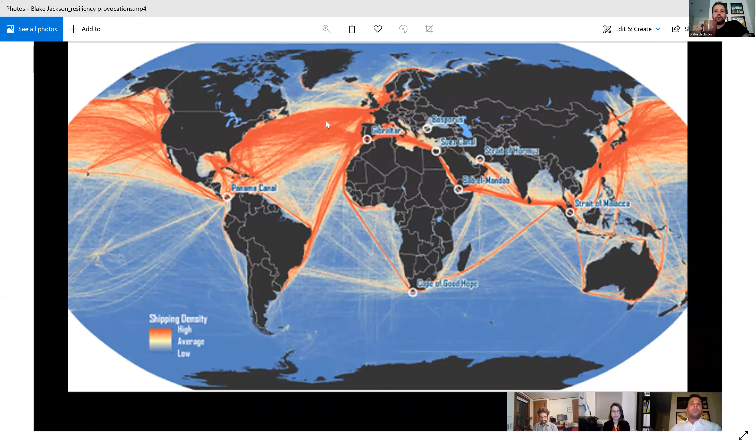This is one of many diagrams I could have chosen to really talk about the importance of coastal cities and their interconnectivity internationally, and their purpose in being a place that not only does commerce, but also is a place where people want to be. We're going to talk a lot about Boston tonight. We realize this is a Boston-based conference with a New England-based clientele, and this is going to feel like an Affleck and Matt Damon movie after we're done, I'm sure.

If we think about Boston, it's 400 years of urban morphology from its founding by the Pilgrims up until today. We've actually grown the city by expanding into the water. And there's a big debate nowadays about whether we should retreat from the water, retreat inland, what's the future of coastal cities with climate change and sea level rise.

I'm of the opinion that maybe we continue to develop into the water, and it's in our best interest, because if we don't, the morphology of Boston by 2070 will begin to mimic what it looked like when the Pilgrims arrived in 1630, because of climate change and sea level rise. The approach right now within the city of Boston is to do this brick by brick, or parcel by parcel method, whereby we utilize new developments and large scale renovation projects as they come on board in order to piecemeal the protection needed to modernize our resilience relative to stormwater, heat island, and sea level rise, and blue, green, and gray infrastructure.

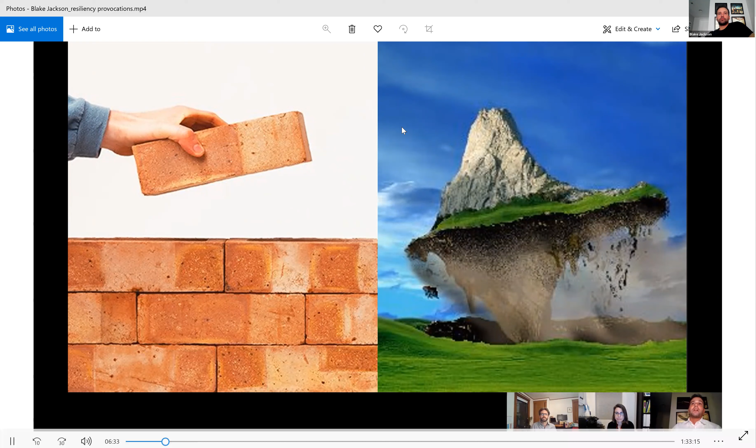On the flip side, the other methodology would be to lift a mountain, so to speak, or to think in terms of big scale urban mega-infrastructure projects. The goal was to think big. So at least with terra firma, I'm not thinking in terms of brick by brick, but more of moving the mountain that I feel is necessary to protect us. And I'm certainly not the first or only person who has thought about this.

This is a plan from the mid-1980s done by Antonio Di Mambro, and he envisioned a plan whereby we would link Winthrop to Quincy via harbor islands and green and gray infrastructure projects that would broaden the city, enrich the city, create opportunities that didn't exist before, and buy us the long-term protection that we'll need in a changing climate. More recently, there have been adaptations of this plan that look at just what it would take to protect the inner harbor.

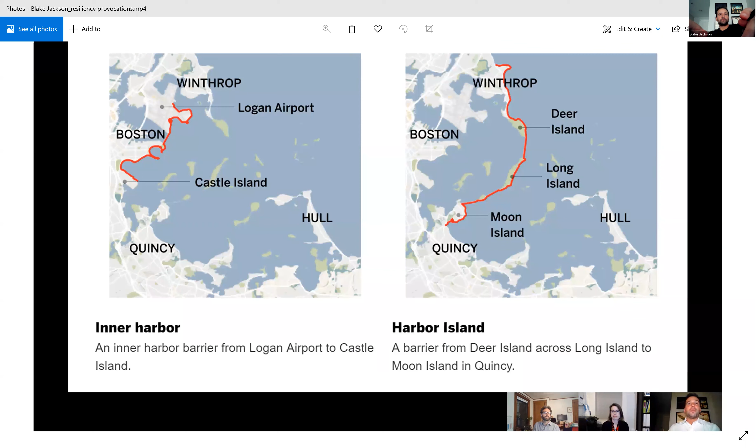Utilizing Di Mambro's plan of the harbor line necklace that connects Winthrop to Quincy. More ambitious would be connecting the outer harbor, which is Winthrop all the way and everything to the west. A more recent development within this plan would be the sapphire necklace, which utilizes a hybrid approach to these series of plans in order to buy protection, acknowledging the fact that some climate change is inevitable.

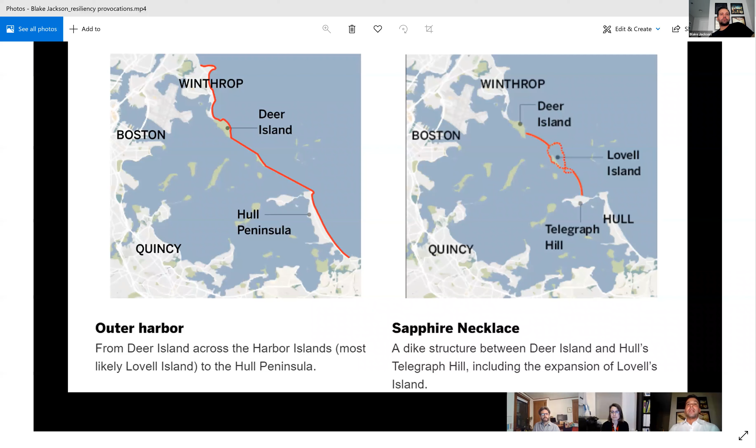I would like to remind the good people of Boston that we have done and performed large-scale infrastructure projects before, and perhaps the large-scale infrastructure projects of the past are impeding us from being able to envision the future, just because there were unintended consequences and price overruns associated with them. But I continue to be an advocate of dreaming big.

So we're acknowledging the fact that maybe even our best climate scientists don't really understand the level of detail or concern in their predictions. Maybe they're a bit too conservative. The jury is still out.

So I began to look at where our development is being planned and where our most vulnerable sites are, relative to the area of most interest. And it just so happens to be our beloved seaport. This is a look at the seaport.

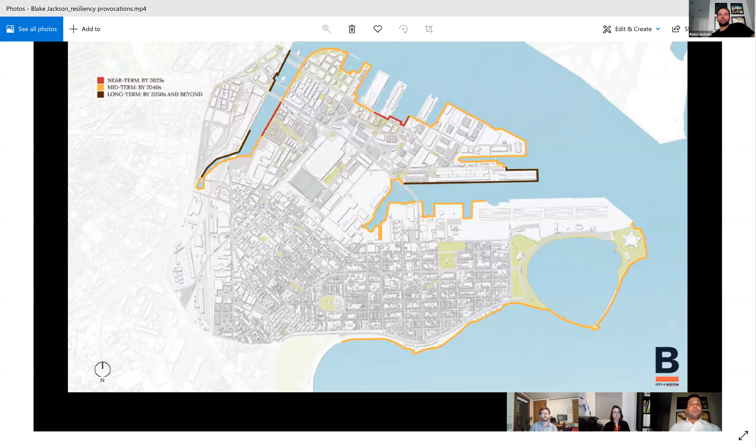And again, this is with the brick-by-brick or parcel-by-parcel development upgrade approach. These are numbers from 2018, the latest numbers I could find that have been quantified as part of the Climate Ready Boston reporting.

The capital cost to realize these measures in 2018 dollars was between $513 million to $1 billion, with an annual maintenance cost between $7.7 to $15 million, a net project benefit of 3.9 to 19. I couldn't find the exact definition of what this meant, but I believe it meant the money invested relative to the real estate protected, and the benefit-to-cost ratio, which is the sum of the two numbers above relative to the net project benefit, somewhere between 8.7 to 44.9.

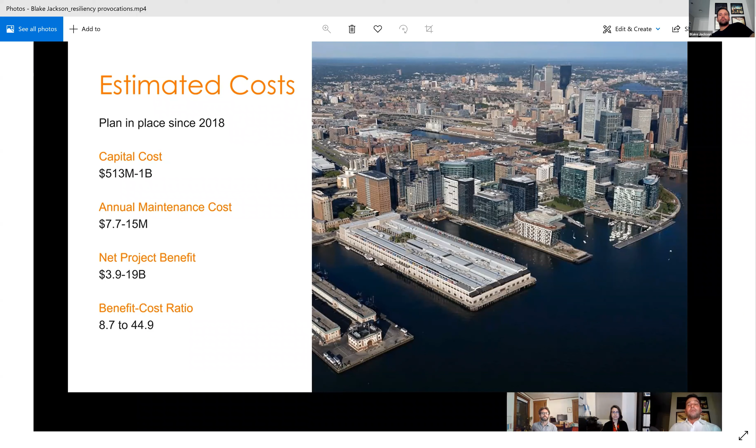But I'd suggest we just focus on these larger numbers than the first three categories up at the top here. So again, for a brand new neighborhood, there's already a lot of risk built into it that comes with the territory, so to speak.

If we start to look at the exposure also in place as of 2018, currently almost 1,000 people, 60 buildings, and $140 million worth of damages can be expected from issues like what we talked about with 2017 and also 2015 with the snowpocalypse. But if you look at 2030, this number begins to ramp up pretty substantially—the amount of money involved ratchets up about 10 times.

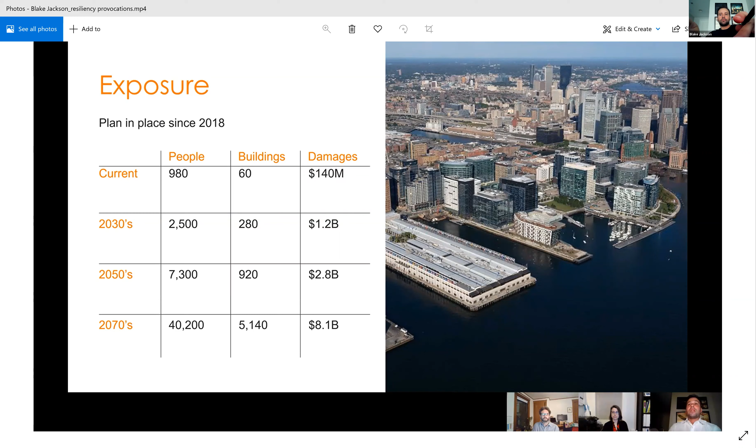And then at 2070, it really begins to spiral out of control. So as a business-as-usual case, we're looking at upwards of 40,000 people impacted, over 5,100 buildings, and $8.1 billion of damages if we don't do anything. So again, we are talking about 2030—if we don't do anything by then, it completely spirals out of control by 2050 and beyond. And it's not such a foreign idea, even today, to build into the land.

Even though the retreat is a conversation being had by others, there are proposals now along Northern Avenue and the Fort Point Channel that are actually proposing to build green-to-gray infrastructure and active barriers, while maintaining accessibility to the waterfront, recreation space, and a series of different experiences. Because it's not just about real estate and risk, it's also about people, space, and being where you want - the water being a place where we can develop and also a place where we want to develop.

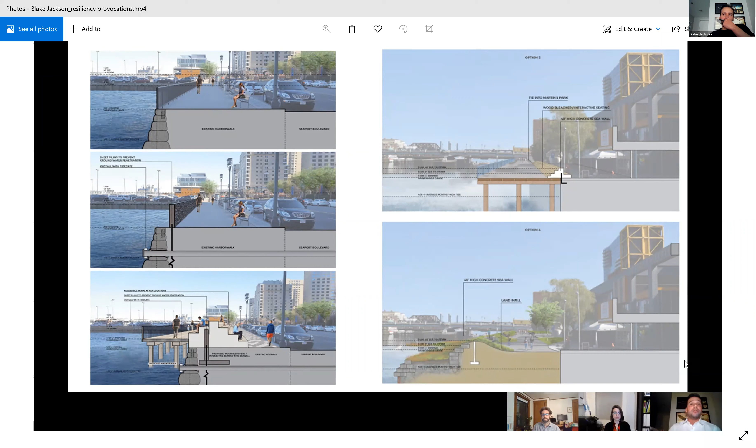Being the largest natural aspect of Boston, it's pretty important, one would argue - it's the reason why we settled here in the first place. And these types of measures are not just being looked at for those two sites, but all around this area of protection, with various different strategies which I'm sure the other panelists will talk about a little later.

This is just one look at this idea behind a living shoreline. This is the east side of the Fort Point Channel in the Seaport. It looks at what was going to be the GE headquarters, and this notion that we're going to have some flooding and maybe that's okay.

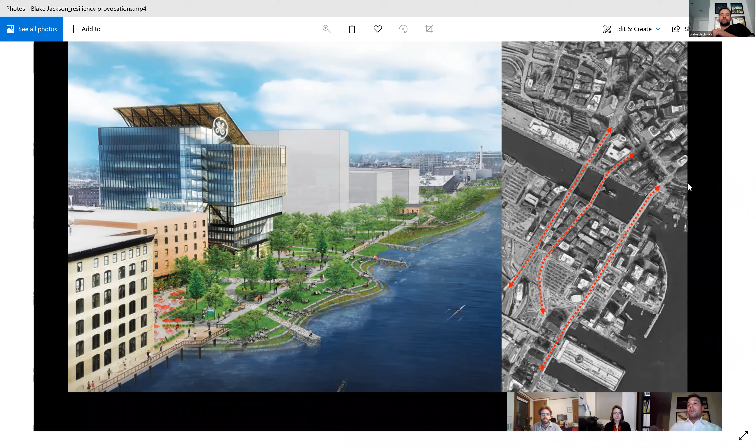But I question that, because there is very limited connectivity between this new neighborhood and the city. If we have flooding in the Fort Point Channel, it creates a scenario where South Boston becomes really an island, and its connectivity to the city becomes, to me, one of the biggest challenges and risks of not thinking big enough. Right now it's already difficult from a traffic standpoint to get to and from this part of the city to the city proper - do we really want to risk making that worse?

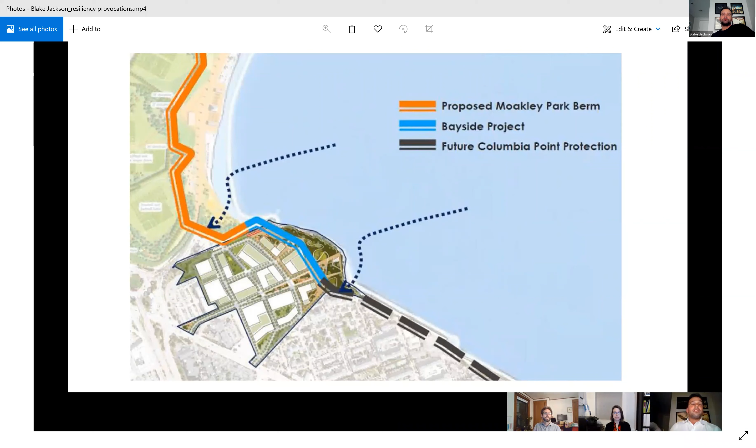This is another look at how the idea is being carried out south of here and other areas of the city - East Boston, Moakley Park and the Bayside neighborhood, Fort Point, and future Columbia Point protection plans. We're having to think about this because the water is going to rise simultaneously everywhere, so it's a time-based situation that we're looking at.

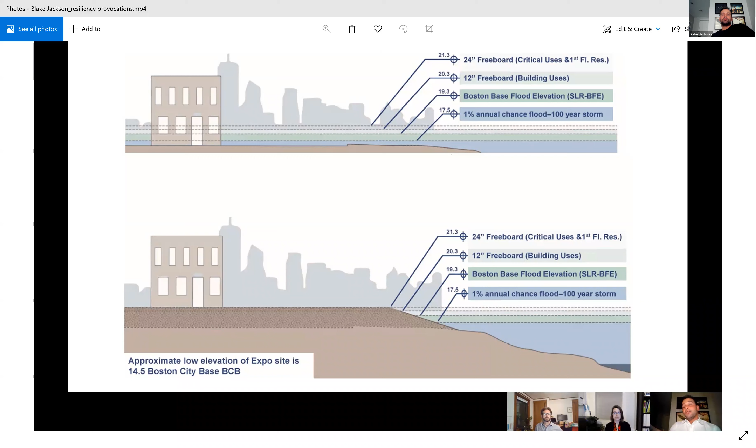Right now the solution is maybe to build up. Maybe the solution is to build up and out, or maybe just out - let's talk a little bit about what that looks like. I'm not trying to say that Dubai's got it right, specifically from a sustainability standpoint, but building out into the water creates an opportunity. New terra firma increases the real estate in and around the waterfront, and that is certainly economically a very viable option. We need to make it an ecological option as well.

So this is a zoom out of the Seaport and a look at our boundary condition of the area that we would utilize the terra firma approach to impact. So what is the challenge? Well, it's the fact that we have 8.25 linear miles of waterfront to protect - it basically protects everything from the sea terminal all the way to South Station and everything behind it.

My solution is simple: let's build out a few feet to create a continuous harbor walk. It's not disjointed as the current one is - that basically lessens the problem. By making the amount of shoreline smaller, we've cut the problem essentially in half, to 4.2 linear miles of wall. It could even be done differently, but what we tried to do here is maintain some of the historic Fort Point Channel.

Access to the cruise ships, as well as the maintenance areas for ships in the eastern point down here. And when you do that, well, what does it create?

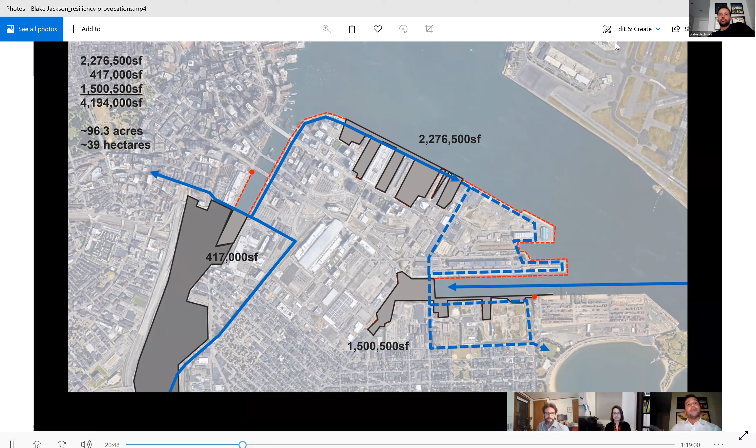So what does this generate in terms of opportunity? Well, these are 2018 March numbers. We looked at typical rents for the various different types of buildings that would be going into any potential development here. So a mix of lab, Class A office, housing, and retail, with a very minimal, almost too conservative, FAR allowable of 6.0.

Which translated to almost 4.2 million square feet of terra firma created. This equals an area of over 25 million square feet. And if you think that it's 30% of all these above uses plus 10% retail at grade, it generates something in the ballpark of $1.8 billion of real estate value per year in just the rents. Again, these are speculations, these are architects' numbers, but that seems to me like a pretty big number of missed opportunity to cut the problem of protecting the neighborhood in half.

And if we look at Plan A, which is business as usual, which we presented earlier, versus Plan B, which is our scheme, or our big idea, the value created is an additional $1.8 billion per year in rents. The capital cost is going to be roughly the same, whether we invested in 8.75 or 8.25 miles of urban coastline, or we invested in filling the land in 4.25 miles of coastline.

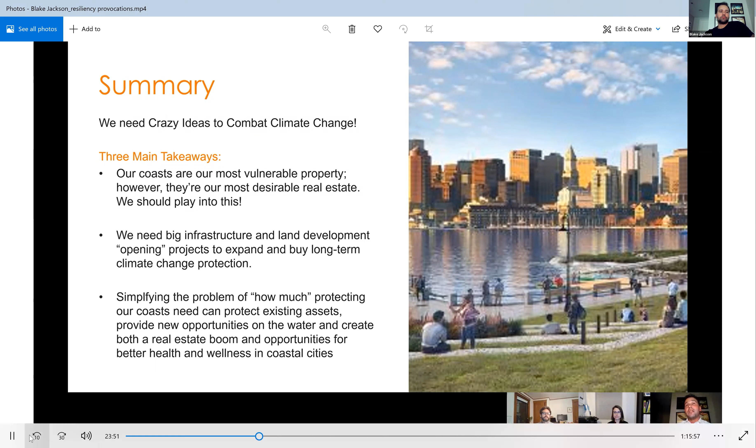Simplifying the problem of how much protection we need can help tremendously, and it can also provide new opportunities to not only get people closer to the water and celebrate the reason why Boston exists in the first place, but it can create a real estate boom and opportunities to enhance the health and wellness of the entire city, not only here in this neighborhood, but other neighborhoods and also other coastal cities.

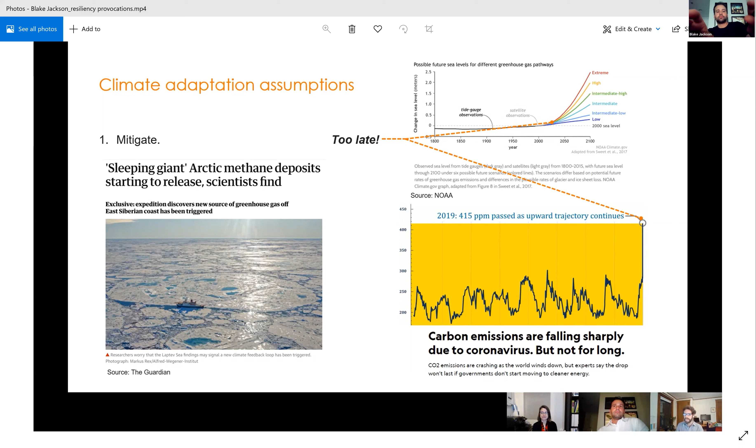Is mitigation important? Sure, but it's not going to happen fast enough. The choices are kind of clear: it's too late to mitigate, we're unlikely to stop building and give up, we're unlikely to stop procreating and building less. I'm sure we can think about colonizing Mars, and some are excited about that, maybe Isabel as well.

I'm giving you a hard time. Moving out of harm's way is expensive and politically tough. Same thing with relocation—not that these are bad strategies, it's just like the Seaport District that Blake talked about. It seems unlikely we'll stop growing or throw away the billions we've already invested.

So building differently, there's an idea. Let's start with Blake's newly created land, which is amazing. We've got new land, that's super exciting, but not so fast—remember, we have to build better. So I don't think it's too much to ask to put some basic stipulations on Blake's amazing new land, and start poking some holes in it, almost literally.

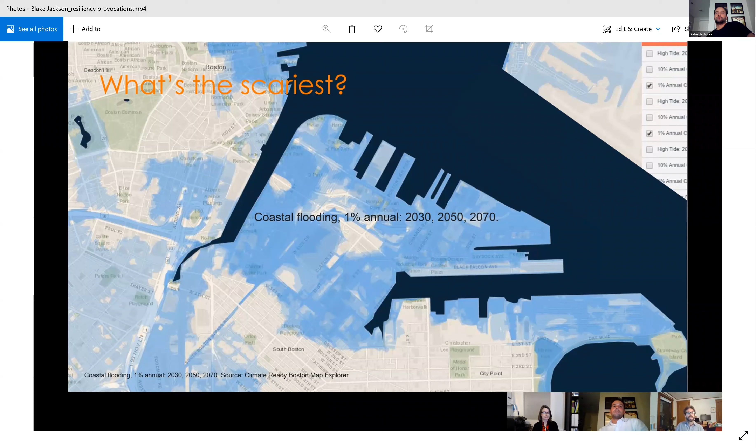Blake showed you some climate projections from the Climate Ready Boston map explorer—you can find that online. What is it we fear most? Here's coastal flooding, as he showed. But that's relatively easy, we can build higher. So why complicate things? Just go ahead and build higher. With that done, we're set. That was pretty easy.

Since the existing bridges from Boston to the Seaport District are at higher elevations, such as Summer Street, running about 10 to 12 feet higher for some portions, there's already precedent in the area for raising roads to meet the elevated sites.

So we can grab this bull by the horns and be proactive before we develop those new sites Blake is proposing, and put those lazy horizontal surfaces to work. What do I mean? Think of a 2-inch rain—that adds 70,000 cubic feet of water to our newly made land, like we have in most of the Seaport District, a very impervious area. Where's that all going to go?

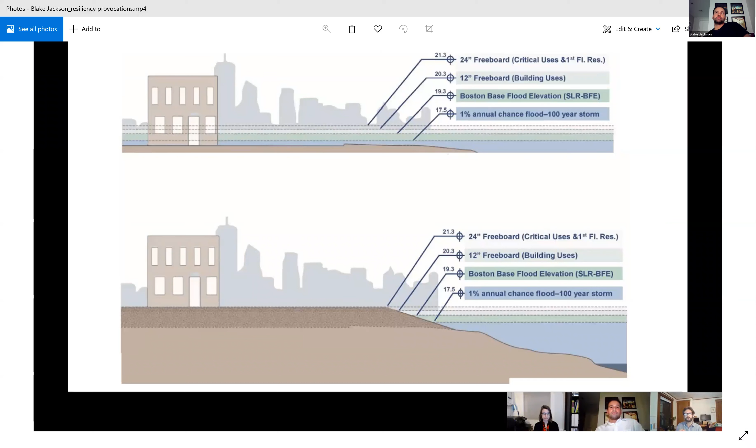So back to what that new land is made of, we can precondition it. There's a fantastic opportunity right under our feet to address not only inland flooding and cloudburst events, but also the other side of the equation—extreme heat—by keeping water available on site when it's most needed. So what's under here right now? It's rarely ever dirt. It would take a lot of H&H studies to find out, maybe one big one, but we can look around us and get a decent idea.

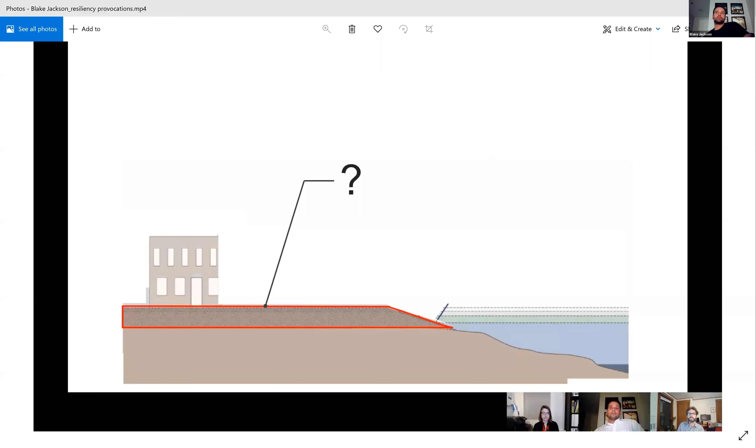And if you remember from civil engineering or geology, remember your soil types?

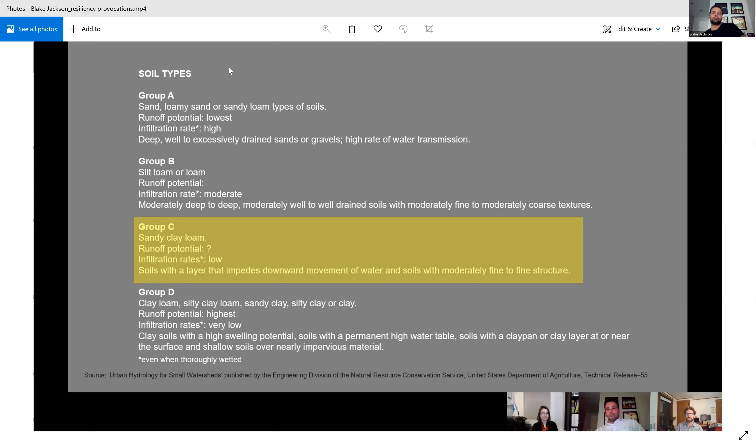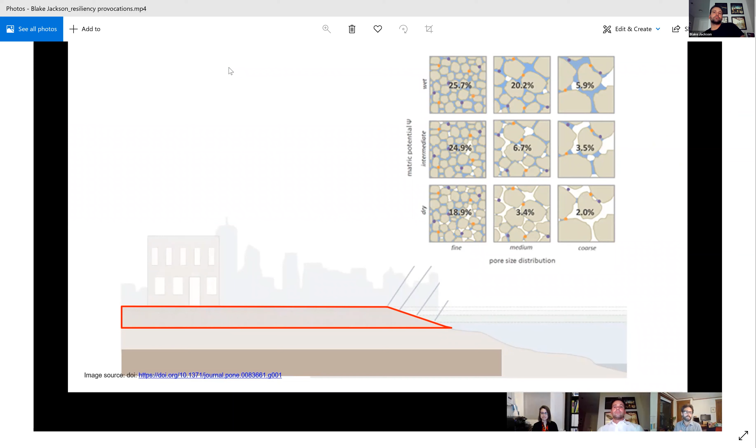So this is a design opportunity. What do we want to be under there? Building higher is, to a large degree, an opportunity for us to redesign what is under there and how we might put it to use as something other than just fill. We're not just filling space, we want to do something with that.

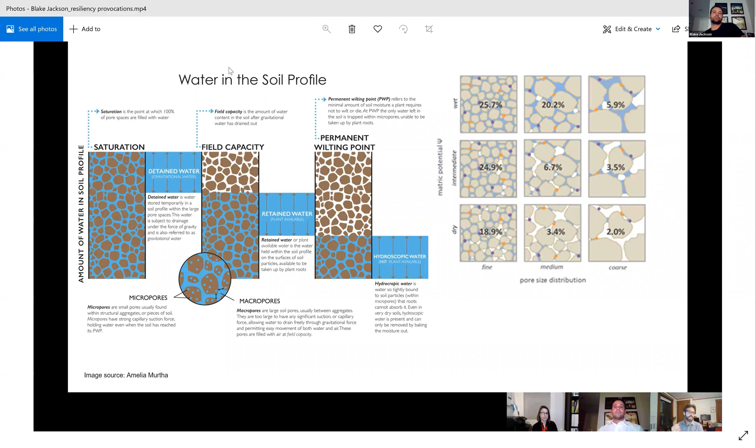Here's where the holes come in. So in this slide, think of the void space in the soil. Those are places where we can hold water. It can be pretty significant depending on the soil or fill type, the water table, the level of saturation of the soil, and this is really our reservoir. The newly made land that Blake is proposing is the reservoir for holding that water.

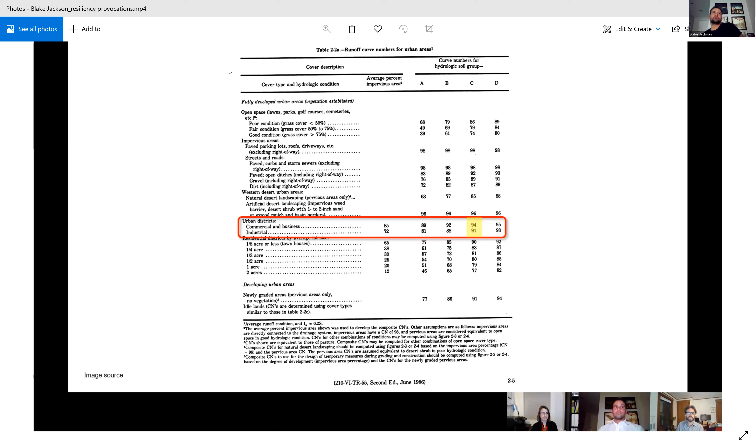We also need to think about infiltration rates and actually use them, deploy them as a micro adaptation strategy cumulatively, collectively, across multiple sites. Think of all of those sites collectively that we could precondition as newly made parcels with 5 to 10% open space that include setbacks. So not the usual hardscaping, remember that.

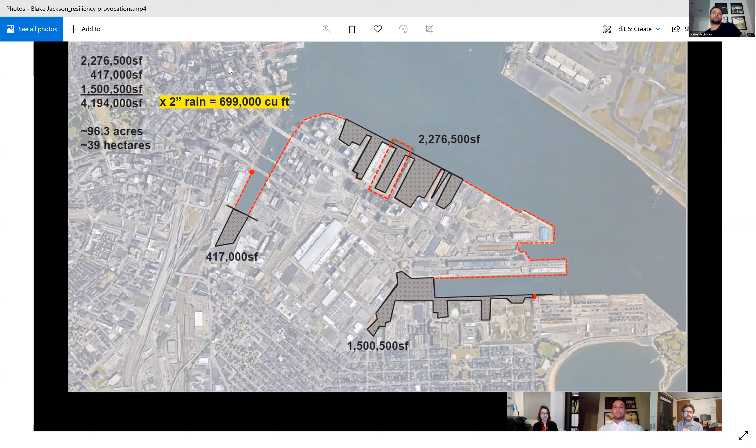So let's take a look. What does that look like for one of the smaller sites, dashed red? See what it looks like when it rains. So if we build densely in the urban cores Blake was talking about, keeping modest setbacks—these are not crazy setbacks, that's 60 feet in there—with a moderately dense building envelope, which I'll touch on later.

We still yield on this site an amazing amount of open space, 50%. Okay, that's a crazy idea, not every site is going to have 50% open space. Fine. But if we think about what's below in that fill area, if we devote just 2 feet of the below grade volume, given those setbacks and assuming some sort of thickness of the containment structure, we still manage to detain over 70,000 cubic feet, 72,000 cubic feet of storm or flood water, and that's for a 2-inch rain, remember.

So as a research question for you students out there, or folks that really want to dig into this: is that a lot? Is that, quote, enough? What's the design storm that we're anticipating here, and what kind of volume do we want to detain? Because this is something, again, we design.

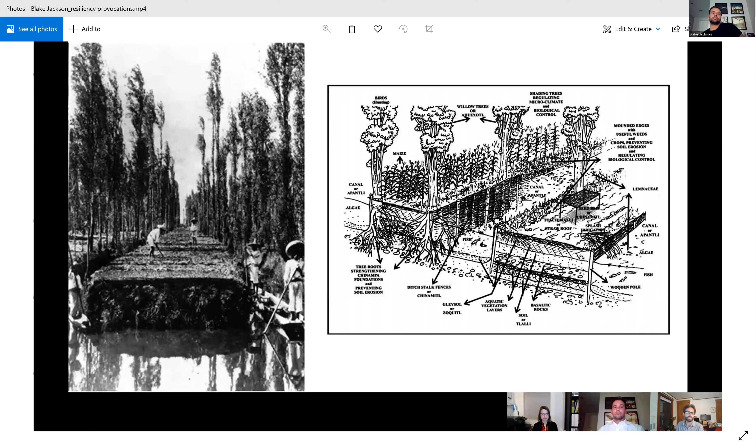So this is folks on barges taking that muck from the bottom that they've dredged up and piling it onto those floating gardens. Pretty cool, I think. It seems like a really amazing place to be. The land is wildly productive. So I really love this example.

But back to reality, the Seaport District is really valuable land, as Blake has alluded to. It's not likely to be given over to raising corn, beans, and squash. Maybe Matt Damon could grow some potatoes on a windowsill, but let's face it, we're not going to build exactly like this. This is the Seaport District—this was working waterfront in the traditional sense through the 1960s. So we can make it feel like one again. If we're not going to focus on a productive landscape beside another productive ecosystem, which is the sea, let's at least get people used to being beside and on the water again, using the language of water, the language of ports.

We're already speaking the language of the seaport. That shipping terminal nearby - why don't we extend it further using technology we're already familiar with?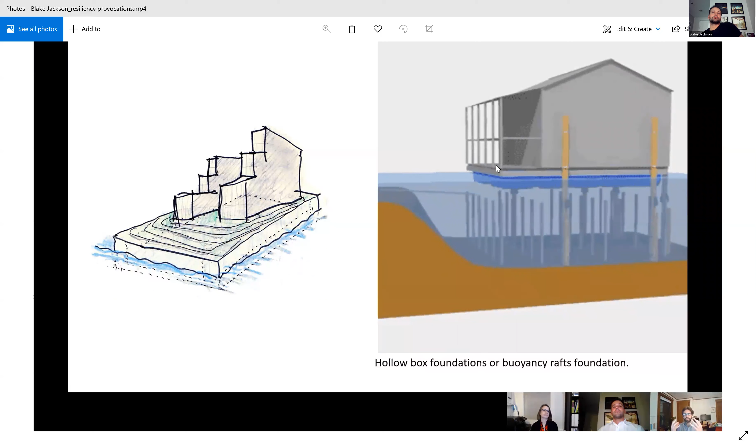So while we're at it, why does the new land we make have to be just fill, down-filled, that sits there and does nothing? Can it float? At the bare minimum, it should keep our new investments above water. But what if we could fill that floating inner tube with a reservoir of water? Water which we'll need later - remember the extreme heat map.

You know, personally, I prefer Christopher Cross, 'Sailing.' I was going to try to play that as a video, but that's kind of tricky. So go listen to Christopher Cross, folks.

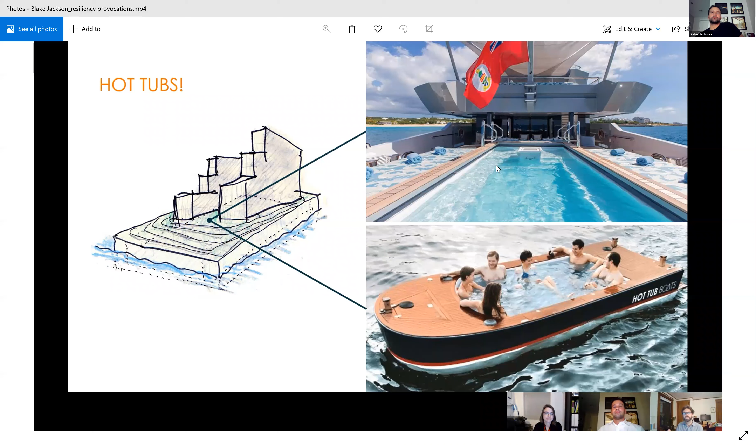Can we return the sea to the seafront? So again, crazy ideas, but those crazy ideas are something that designers love to run with.

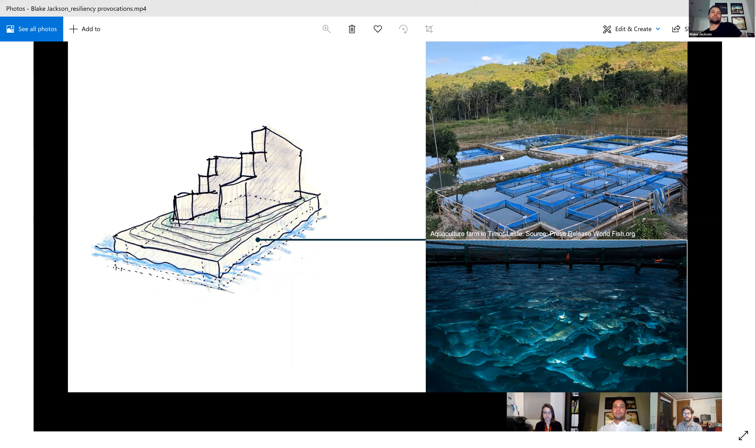Another way of approaching this is horizontally, by shaping the land subtly as nature does. This is the coast, shaped by wind and waves. I realize it's a little different, but think of the Seaport District - it's almost totally flat. It's boring.

Pretty different from many coasts that we'd like to be on. And for land that's adjoining what used to be salt marshes historically, it's actually unnatural. Just remind yourself how water naturally lies on the land - there are spaces for it to sit there and fill in.

So this is about 150 years ago, and I know things changed - depends on local geology, but really salt marshes changed very little. This would have been the case in the area of Roxbury Creek and Fort Point Channel, which we'll touch on in a second. Notice that 16-foot long hay wagon - so by the time you get to the shore, maybe the scale's off a little bit, but there's a substantial change in elevation at the shore.

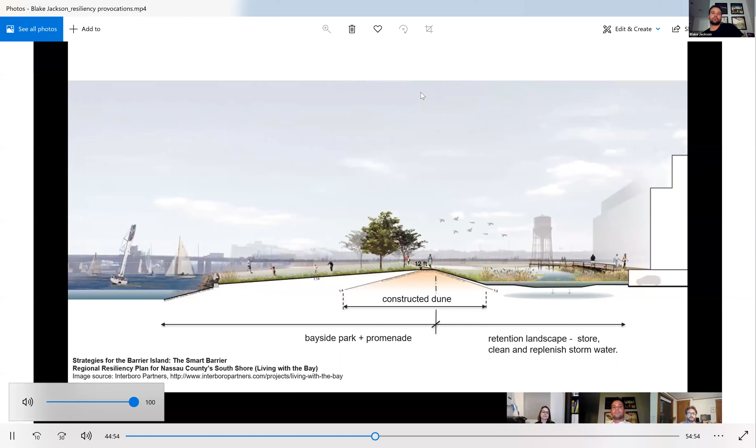And we can do this on large scales, especially if we have the advantage of horizontal distance. There's the Moakley Park project, which is a fantastic project - I think Isabella's going to touch on that. And it builds a set of dunes.

A constructed dune, with a berm on the inside - kind of belts and suspenders. But don't forget that we've got water coming from the inland side of things, in this case the South Boston neighborhood. So we can't absorb the sea, but we can detain stormwater and manage inland flooding to a degree.

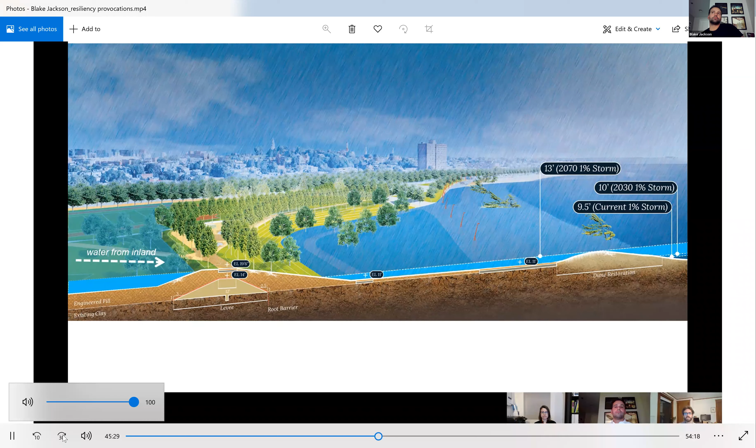We can also do this on a smaller site scale. This is actually from the proposal for the Fort Point Channel open space plan, which we didn't get, unfortunately, but we still thought our ideas were good. So make that water have to work to get to your building - drive it uphill. And while it's being forced to move horizontally, it's losing ground, literally, by being absorbed through more porous surfaces. And if you have the advantage of horizontal distance, you can try to balance cut and fill.

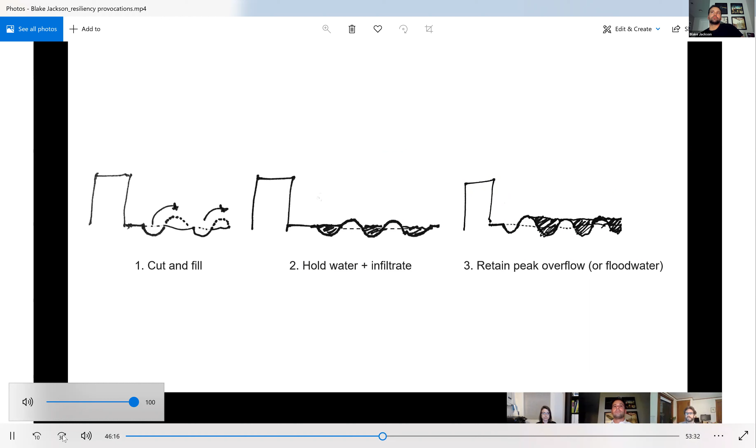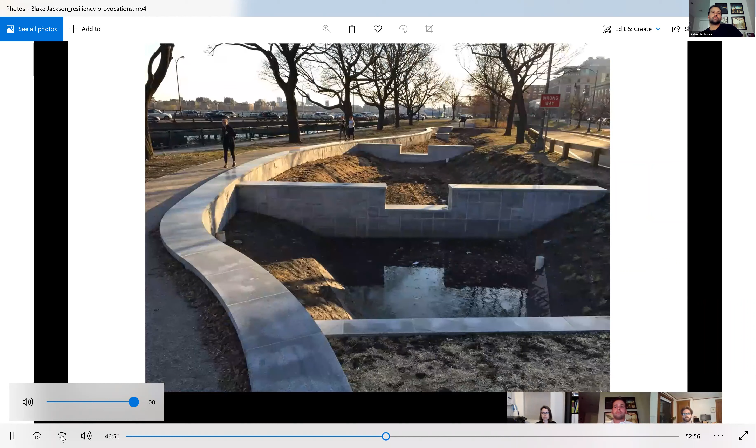There are lots of ways to do this: stormwater detention, infiltration trenches, tree pits, bioswales. This is an example alongside Longfellow Bridge. It's a stormwater detention basin, which keeps water from flowing straight into the Charles River. You'll hear more about these kinds of techniques from Isabel later. In this one, the water has to move through baffles and gets infiltrated long before it goes out into the Charles River, so it's also cleaning the water in the process.

And it creates a pretty interesting space for people to jog and walk along, and introduces some wildlife spaces. Aquatic plants help to clean that water and absorb it.

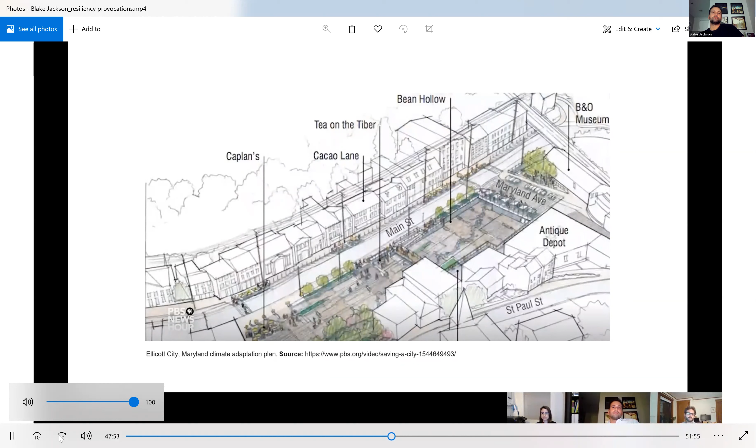In Ellicott City, Maryland, they even proposed taking out urban city blocks in their historic district, which is really hardscaped and impervious. They thought about that because stormwater, exacerbated by a nearby stream that overflows in heavy rains, had nowhere else to go. So this is a pretty risky idea in the downtown historic district. I think it's very interesting.

So we can subtly alter that topography and shape the land as we've done for centuries. In the Seaport District, which is so flat, part of the excitement of being on the coast is those subtle changes, those ups and downs, those shifts in views.

Using elevated walks, using the language of the seaport, we're already used to walking on gangways and boardwalks to get to boats and ships. It provides the added benefit of meeting ADA compliance, and maybe gives opportunities to fine-tune keeping people high and dry when flooding does occur, like they might do temporarily in Venice. So you'll be shaping both the land and the walking surfaces, which won't always be one and the same.

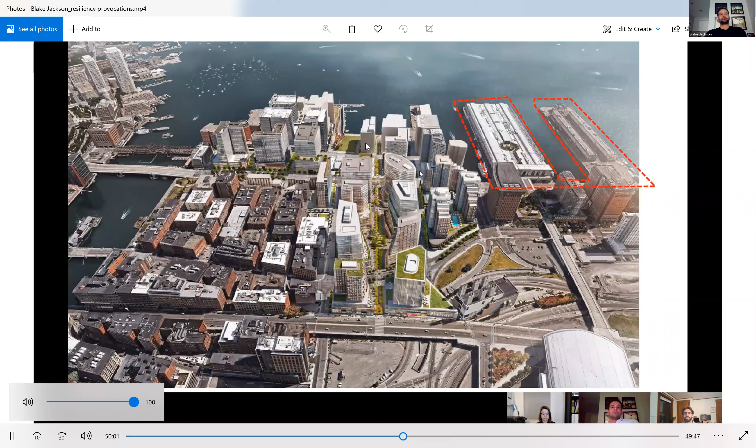So back to that view of the Seaport District, does this look inviting to you? Some places are walkable, some good planning is happening. But looking to the right, that dashed red line—do we really want to build right up to the sea? If we develop new land parcels like they did at the World Trade Center, this is the area in the dash, that's World Trade Center here, along the water, it's really a missed opportunity. It's unfair to the many talented landscape architects and engineers out there who've designed much more sensitive ways of meeting the water, not just recently, but for many years.

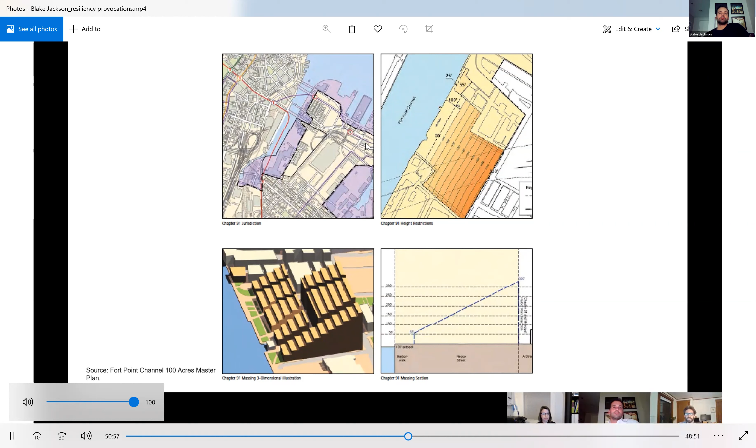And this isn't even sea frontage—the Fort Point Channel is not fronting on the sea. So let's double it. What would that look like? Something like this: hold back 200 feet and build up 300 feet max.

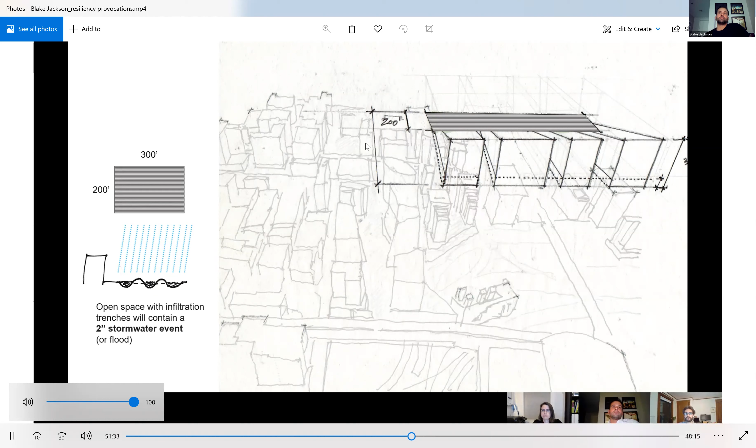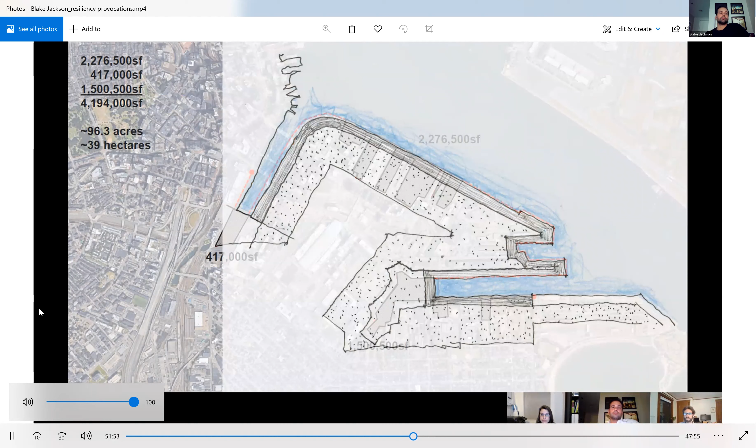So you get some open space with infiltration trenches if you corrugate that land effectively, balancing that cut and fill. Maybe it makes it a little tougher to mow, but if you do that, you can contain a 2-inch stormwater event—that's a lot of water on one parcel, really significant. Now imagine those techniques combined—holes and hills and some hot tubs—not only for the newly made land, but for adjoining parcels as they get adapted over the next however many years, because we are going to be adapting some of these parcels, right?

We're talking about building for the long run. It's not just the spaces that Blake was talking about. We're also talking about some of these really underdeveloped pieces of land here, and those connections that Blake was showing. You've got a real opportunity if you're combining these strategies, holes and hills.

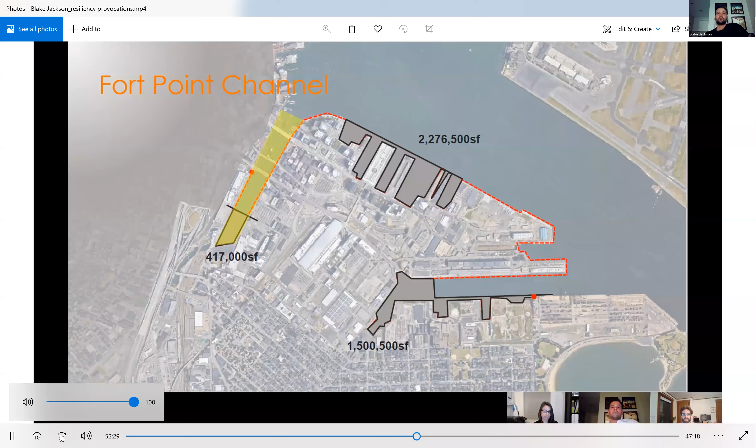So here's a quick calc, I'll go through it really quick. Just give me the whole Fort Point channel, that's all I ask. It's only 4.2 million square feet, something like that. It's kind of a drop in the bucket in this whole Seaport District.

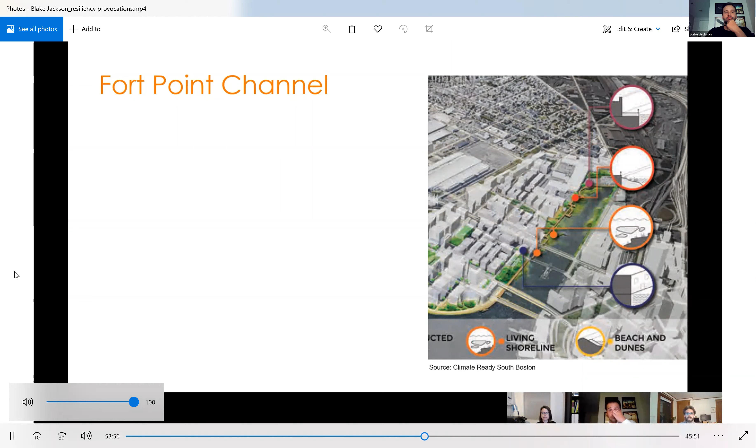And that has been proposed. This is from Climate Ready South Boston, which Blake touched on. It's a naturalized edge that they're proposing. I think they did some very good work on this, and it corresponds to what was there long ago, right? A little more naturalized, but it's not really enough, for a $108 to $139 million price tag.

Now I would say, why don't we let the Fort Point Channel be a real contrast to the rest of the 75 to 90% hardscape Seaport District? There is no park in the Seaport District. Well, there's some small ones, I take that back, but really there's no major park. Let's make this a regional park, make it a wetland, a wildlife area.

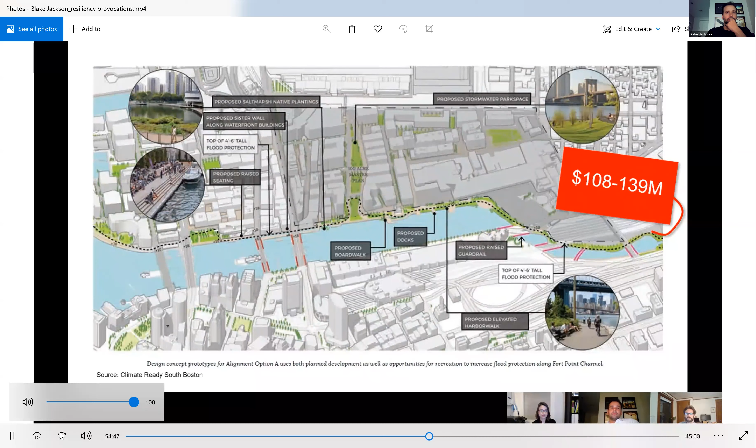So in short, you want to make it a destination. If you're going to develop this much land, you need some lungs, you need a breathing space, not just a glorified drainage ditch. So fill that Fort Point Channel in, let it silt up.

Then you can build moderately densely on the parcels, that's 100 acres, immediately adjoining the channel. There's a lot of building you can have on that site and still maintain a lot of open space. Now this is probably the worst Photoshop job you've ever seen, but you get the idea. Something major in this area. Again, you can build a lot while balancing that natural area.

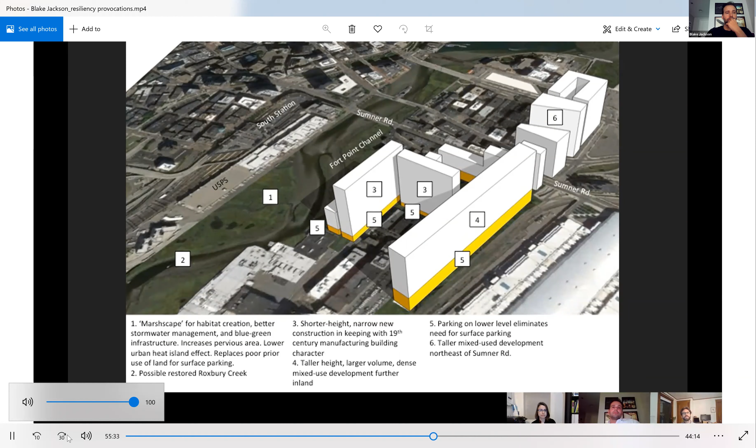So if we scale up that vision of coastal development, it's built denser and higher to respond to sea level rise, while introducing some new topography for catching and retaining water and introducing naturalized edges. How do we need to refine what's existing?

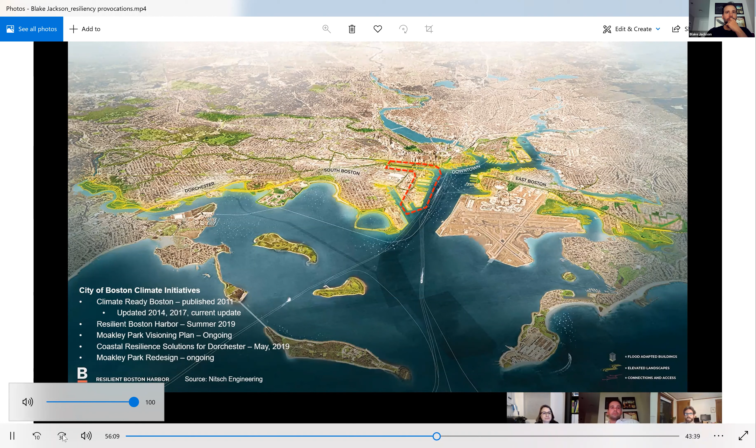This is the Resilient Boston Harbor Plan. I think it's excellent. Do we need to tweak it? Again, as Blake was showing, here's the Fort Point district, here's the area that Blake was talking about, and we're still kind of using that zigzag, snaggletooth edge. Is there something you need to do to tweak it? There's a Fort Point channel and green space along.

So I want to leave you with a couple of research questions and some challenges. Scale it up. Think about the coast of New England, the entire coast. Think big. What's the length of that coastline? What is the percentage of coastal properties that are developed or urbanized right now? What's the projected growth? Blake talked about new people that are going to be moving in. It's only going to get denser.

Accounting for future projections, of course. What's the potential available catchment area required to detain that volume? And how long do we want to detain that for? And finally, what's the percentage of impervious area that's required to eliminate peak outflows?

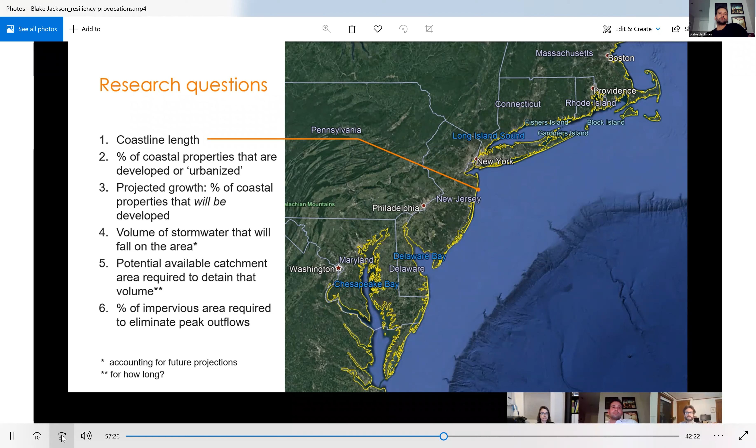Eliminate, not just slow them down. So I'm going to leave you with some challenges. Can you manage not only the stormwater that falls on your site, but your neighbor's? How do we monetize this? Again, this is not just stormwater, this is water, a life-giving force that we want to retain and use to cool. And there's some advantage to being able to do that if your neighbor can't. Maybe you can monetize it. And again, if you're going to create new land, put it to work. Don't just build back like you used to and let it be impervious area.

So finally, we want to design smarter and build differently. So you have your slide.

So maybe tuning into my version of Resilience Provocations, a holistic strategy for the 21st century, an inspirational strategy. We'll see. I'm approaching the topic from a slightly different angle than my architect colleagues, given my training as a planner and geographer, and also with a background in soil science. So stay tuned on that.

So here is my agenda for this presentation. I will just briefly talk about resilience and the goals behind it, what we want to accomplish and how, before showing some resilience strategies with a focus on stormwater, transportation, and energy infrastructure.

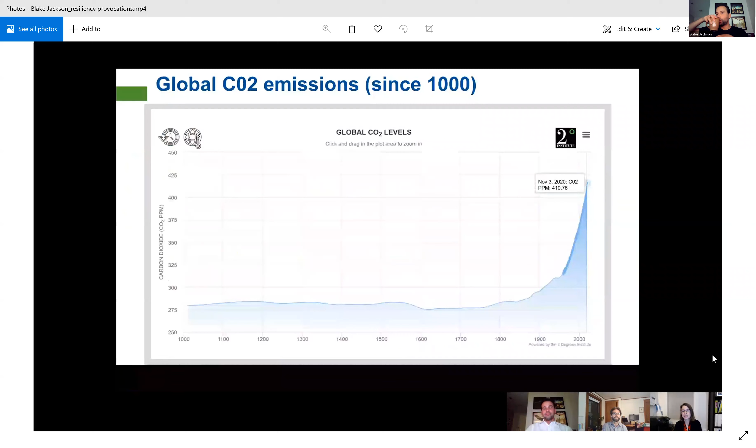So today we're actually a little lower, thanks to COVID, but I'm sure we'll get back to a higher emission. As scientists discovered at the end of last century, carbon emissions create the so-called greenhouse gas effect, which leads to rising temperatures in the atmosphere.

And why is that? Why does that matter? So IPCC, the Intergovernmental Panel on Climate Change, set a threshold of 2 degrees Celsius, so 3.6 degrees Fahrenheit, and they say this amount is crucial, as if our temperature rises 2 degrees higher than the 1850 average, we're getting into serious trouble and our climate actually might collapse. So right now we're on a course to reach those 2 degrees Celsius increase in the 2060s. So we're on a straight course towards there.

So I'm challenging Dave here a little bit, as mitigation alone is too late. So I will try to show throughout this presentation that we have to mitigate and adapt.

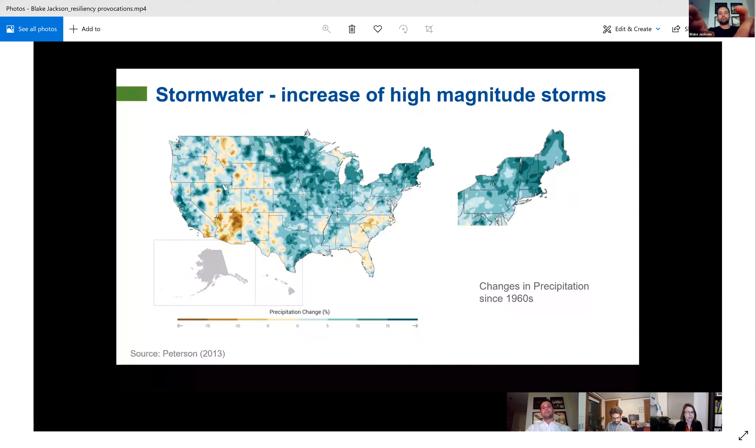Globally, the changing climate has led to more intense storms and strong hurricanes, such as Hurricane Harvey in Houston, Texas in 2017, or typhoons in other parts of the world. And as we know, those incidents also bring with them incidental fires, environmental and natural hazards, dislocation of families, etc. And on the other hand, we've seen an increase in devastating fires due to drought conditions and lightning in Australia earlier this year and California this summer.

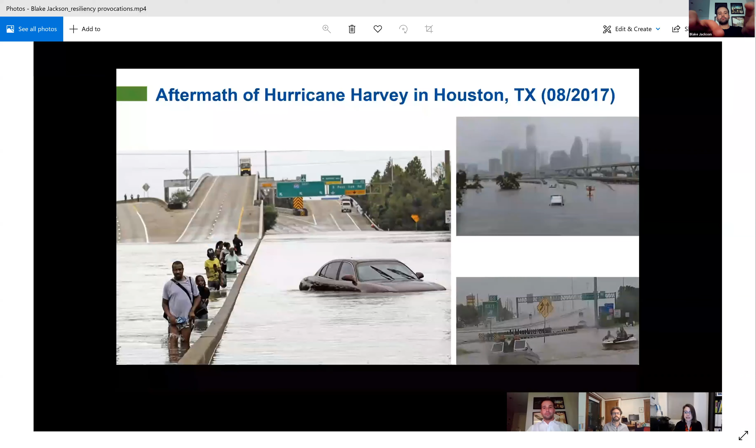Now we might be intimately familiar with those new records in high heat, drought conditions, and rainstorm events of increasing magnitude. And we might even forget about why that's actually important and why that matters.

And it's almost registering as the new normal. But we should remind ourselves that this is only the beginning, and we will see much stronger and more devastating storms on a more frequent basis in the future.

But these storms are all linked to higher temperatures, due to our oceans holding more warmer water, and since we are not really stopping greenhouse gas emissions from increasing, those seas are going to increase in warmth, which will lead to even higher and more magnitude storm events. That's what I mean by the climate might eventually collapse at some point.

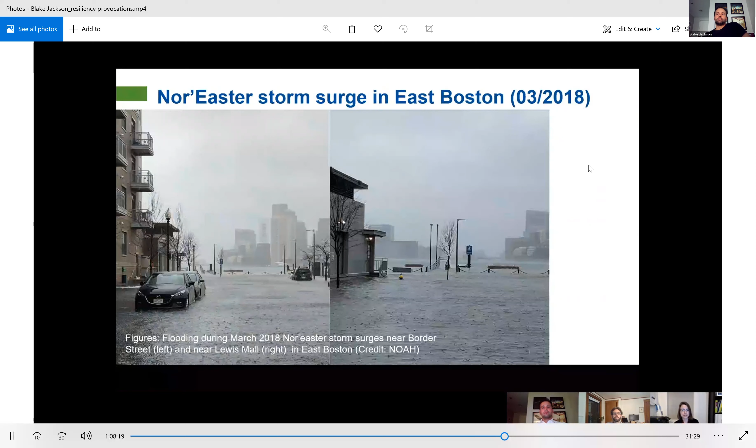As practitioners, we have a responsibility to plan for climate change, and this starts with understanding the risks and vulnerabilities and making a plan for it. Mere adaptation won't be enough. So we also have to reduce our carbon emissions to limit further increase in temperature.

This brings me to the 3 resilience strategies I promote here, which are also shared by the Kresge Foundation. They define resilience as reducing greenhouse gas emissions that contribute to climate change mitigation measures, as fighting the consequences of climate change through adaptation measures, and as fostering social cohesion and inclusion.

So what that means is that in order to make those necessary changes, we have to factor the people in. I've listed some examples here for those strategies, and I will talk about these in more detail later. People are needed because they actually need to change their behavior, and eventually also need to pay for the needed investment. So with this definition of the Kresge Foundation of Resilience, the 3 pillars I'm going to promote today are carbon reduction, protection, and social cohesion.

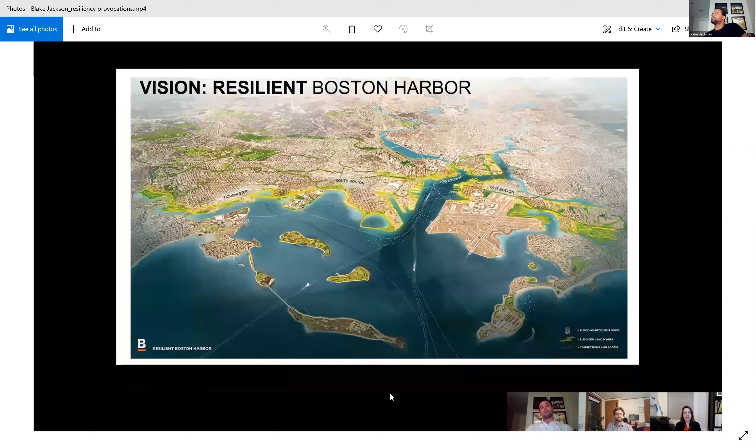So how do we get there? The Boston Harbor Vision Plan, released a couple of years ago, paints a beautiful, accessible, and green vision of our coastline, which at the same time protects us from sea level rise and future storm surges. I will talk about it some more in the future.

So I mentioned people. The strategy should also play towards creating a healthier, cleaner, safer, more enjoyable, and less car-centered environment, so we can actually reduce greenhouse gases, and people are buying into that.

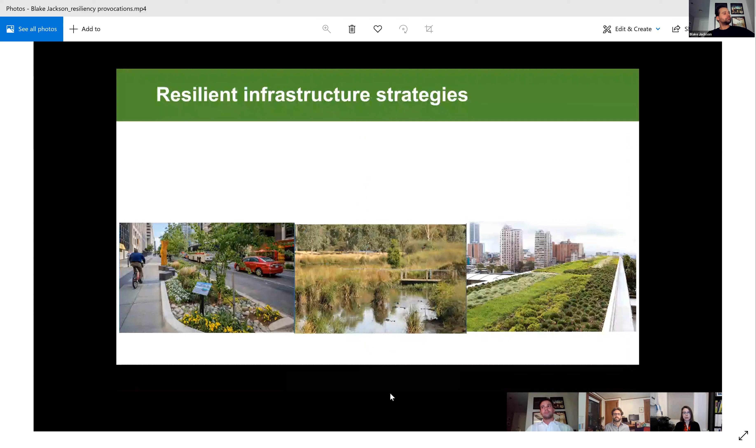So let's start with how we can advance those strategies forward. Looking at the biggest greenhouse gas emitters, we have buildings, heating and cooling, we have energy production, and we have the transportation sector. I will focus on energy and transportation in the following.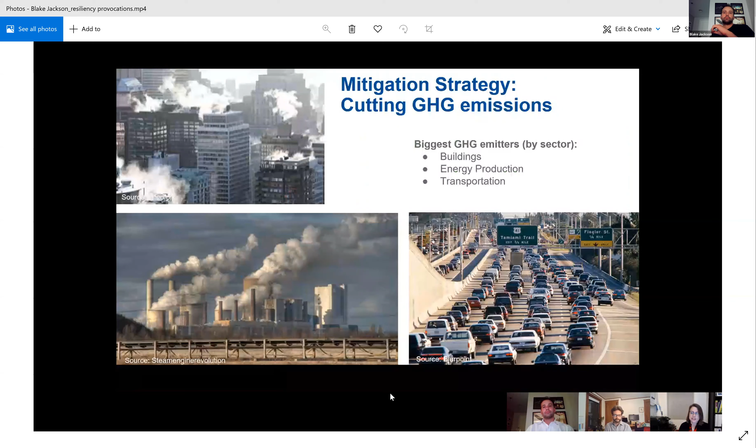Boston has already set its goal to become carbon neutral by 2050, and has set guidelines, frameworks, and policies that support these measures, and they're also working towards smart utilities. So I challenge us to do even more, because we need to act faster and ideally meet the carbon neutrality goal earlier than 2050. A good plan starts with an actual understanding of the risk and vulnerability.

So let's take a closer look at the vulnerabilities. How does the 2070, 1% chance storm actually impact our infrastructure. And what we see here is a slide from the Climate Ready Dorchester report, which was just released. We were happy about it. And it shows the conditions in gray for 2030 and in light gray for 2070, again the 1% chance storm.

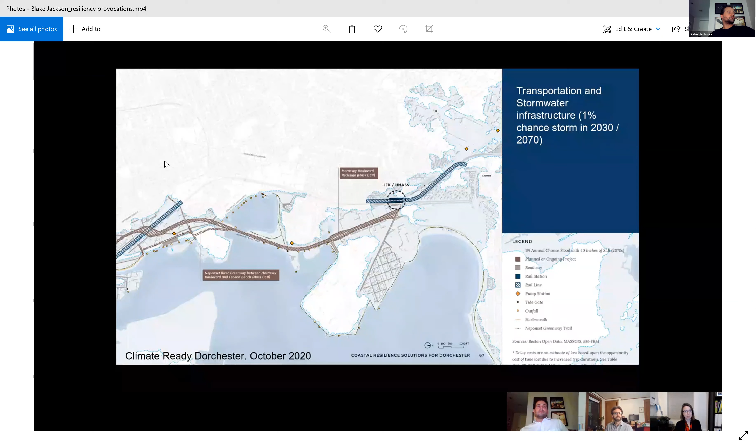And then on the other hand, I will be talking about stormwater a little bit more. What is notable here is that a lot of the combined storm water sewer outfalls are also going to be flooded. And in addition, we have a couple of pump stations, known as these diamonds, that are also going to be impacted, which will cause some issues eventually.

In order to get a better understanding of how coastal flooding may affect the city, the Boston Water and Sewer Commission developed a two-dimensional model that analyzes different storm scenarios for the entire infrastructure within the city. This model includes the sea level rise conditions in the 2070s, and it can simulate the effects of tides and different rainstorm events through different time series. It's pretty amazing. We used this model to simulate flood conditions for the development of stormwater strategies at Moakley Park.

And so why is this an issue? Why is this a problem? As we know, if water can't infiltrate into the soil, it cannot discharge quickly enough through the pipes because there is too much rain at the same time, because of localized flooding where it falls. During high tides, this may also lead to backflow, and water may surcharge at manholes, so we create even more flooding. And with rising tide conditions, you can guess what's happening then.

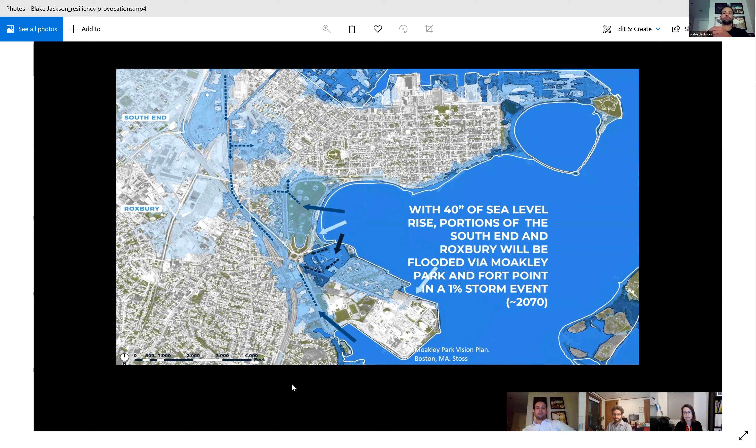Also another notion tying it back to Dave here: the soils found at Moakley Park are partly clay soils, which have a very high runoff potential, so low infiltration. In a storm event, the ball fields there, the water just stands and doesn't infiltrate, which is a major issue. That's also why the strategy deployed at Moakley Park looks at those stormwater and coastal water flooding strategies.

This slide is a conceptual design slide, based on the storm flood pathways that Woods Hole Group modeled. They are currently developing a new model for coastal flooding that incorporates more recent greenhouse gas emissions, so it's more accurate than what we've been using in the Climate Ready Boston model in the past.

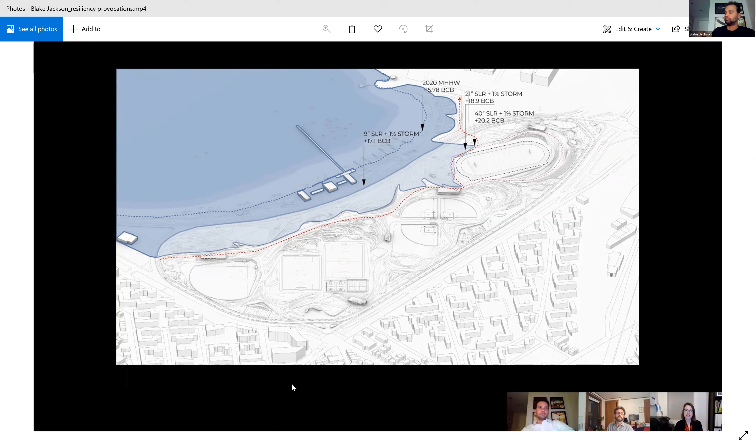You see pretty much up to this red line here. This is what will later become a berm or a flood alleviation barrier, as they call it. And this is what was designed with these strategies that were at hand.

Previously Moakley Park didn't really feel like a coastal park, and still doesn't, because it's separated by Day Boulevard from Carson Beach. But the intent of the new design will look at more typical coastal strategies - dunes, beaches, wetland areas and marshes - where even the boardwalk are going to be deployed eventually.

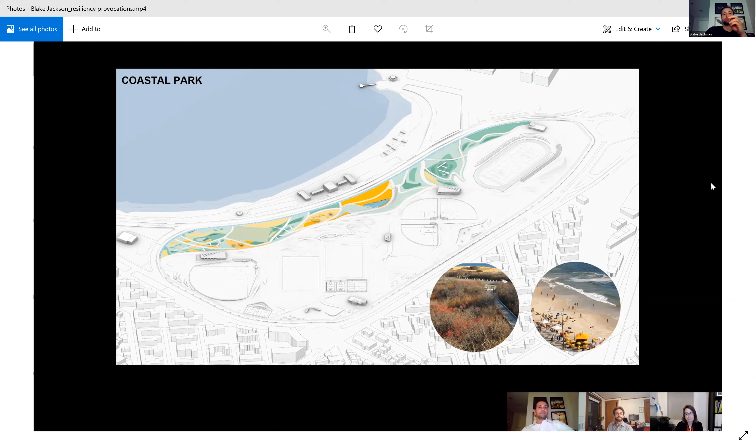This is a screenshot from the site, looking at it from the Bay City location. You see various stormwater strategies deployed here - stormwater meadows are a notably cool strategy that was used. We also have a hybrid solution of underground water tanks designed here.

All in all, Moakley Park is a great example of multi-benefit solutions. First, we have both stormwater and coastal flooding addressed, but it was also very interesting to hear from people what they would like to see - other parts that may be more accessible, people wanting to bike there and enjoy it even more than they can today. So all this was incorporated into the slide and into the strategies.

With my second strategy, I want to focus on the transportation sector, which, as we mentioned, is one of the larger greenhouse gas emitters. And just to remind ourselves, we have some serious flood issues to deal with in the future.

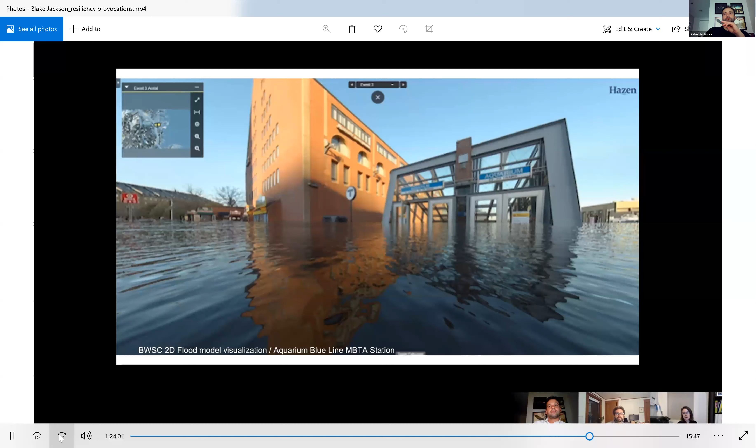So how are we going to deal with that? One solution might be to bring good old duck tours back into the plan and use those as a major transportation medium. But it becomes pretty clear that we need more hardened, flood-proof and elevated infrastructure. What's been proposed by Climate Ready Boston is elevation of the harbor walk and roadway sections.

But to be provocative, here's another idea that seems a little more holistic. It comes back to the notion: if we're able to actually protect our coastline, wouldn't it be beautiful to have the city more usable for people? Can we create healthy, walkable, bikeable places and get rid of the cars? Kind of like the status quo we have right now - can we extend on this?

One strategy here would be to create a truly multimodal city which focuses on biking, walking and public transit in the city, and leaves the cars outside of the city.

As advertised earlier, I'm a fan of Elon Musk and his ideas, and this is a picture from the Boring Company. Why not build another, bigger tunnel that actually meets the needs, because the artery that was built just a couple decades ago is always congested - I mean not in these days, but typically it's pretty congested. So it makes sense to come up with a different solution: a bypass tunnel for transit that doesn't even go through or under Boston City proper.

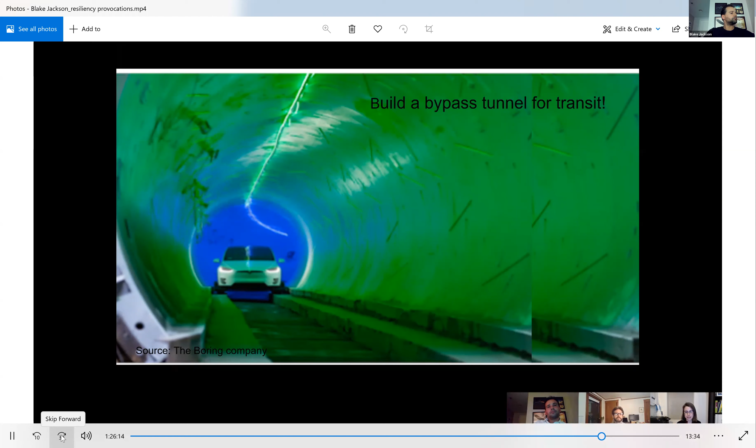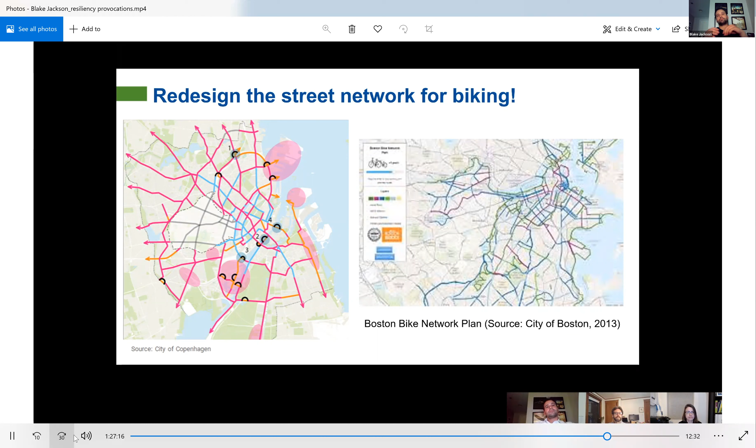So Copenhagen had a vision to become carbon neutral by 2025. And they also have the vision of becoming the new Amsterdam in terms of cycling. Their plan was to have 50% of their people cycle to work.

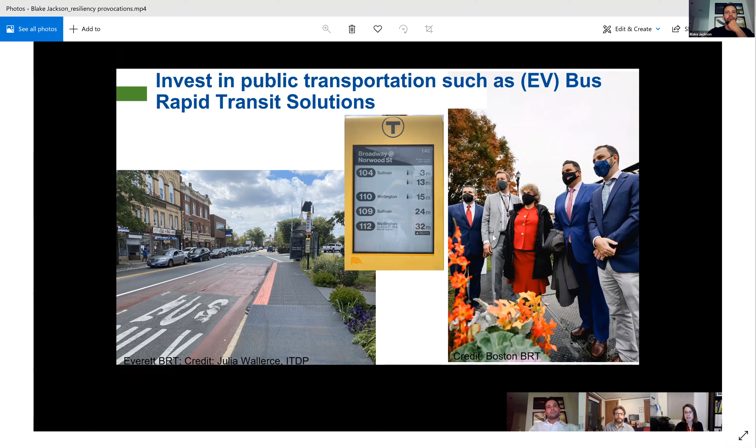So thirdly, as far as transportation strategies go, I would like to suggest investing even more in public transportation, such as EV bus rapid transit solutions. Shown here is the most recent inaugurated BRT line in Everett, which started as a pilot project, and people loved it so they jumped on it. Similarly, we have the Harvard BRT here, or the future Summer Street BRT.

So the idea would be to also electrify the fleet and get more people out of their single-owned vehicles and into buses that use carbon-free energy.

So the last transportation strategy would be to strengthen regional transit and also electrify the fleet. This comes with a nod to the major coalitions already underway, building on Go Boston 2030, and acknowledging there's already a lot of conversation around how to work together, knowing that the MBTA line doesn't cover it all, and that there has to be a more regional approach to get people around and also solve the last mile.

Overall, the strategy would be to make public transportation services more attractive to get ridership up, get people out of their cars, and maybe install television on buses and charging outlets. But for the most part, redistribute funds for public transit and biking lines.

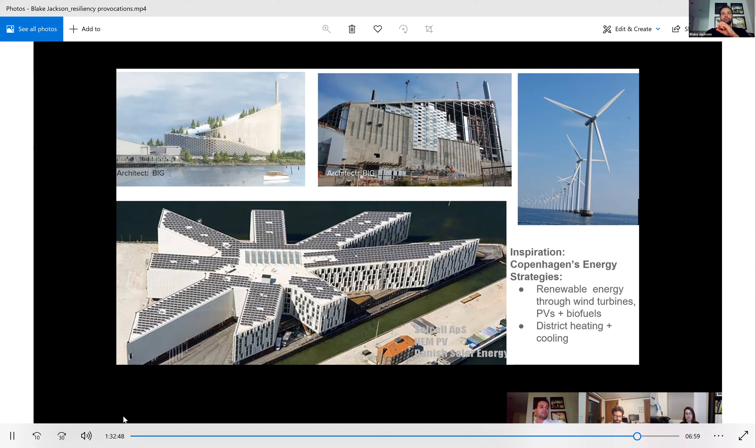For inspiration, I was looking again at Copenhagen. As I said, they set a goal of 2025 to become carbon net zero. Their energy strategies include renewable energies—they installed offshore wind turbines over 25 years ago, they have solar panels and biofuels, and microgrids for district heating and cooling are just the common thing. With respect to the offshore wind farm, this was realized through a co-op, a district-wide energy fund, which looked at local residents to buy in to help finance the wind farm, which was pretty interesting.

So in Massachusetts, we recently enacted some policies and acts towards renewables: the 2016 Act to Promote Energy Diversity and the 2018 Act to Advance Clean Energy. They already promote renewable energies such as solar, and on and offshore wind.

I've challenged this even more, noting that the neighboring state of New York has 9 gigawatts of offshore wind under their purview, and they are progressing really fast. So I'm challenging the administration to offer more of these areas for offshore wind in Massachusetts.

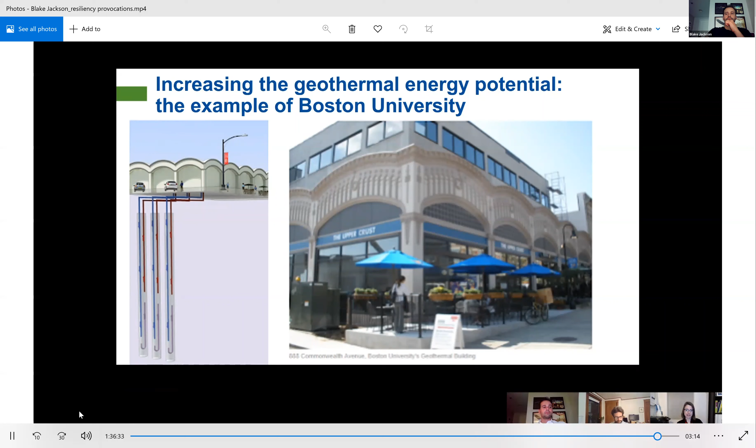So in closing, the key takeaways, what I wanted to show with this presentation is that essentially resilience strategy, in my opinion, should follow 3 basic aspects, and these are both adaptation and mitigation, but then also a strong focus on the people and what they need.

And by understanding the risks and vulnerabilities, we get a much better understanding of what we need to plan for.

And so looking at the stormwater sector and coastal resilience strategies, I try to also make the point as to how multi-benefit strategies can better reach those resilience goals.

Before I launched into stormwater, transportation, and energy infrastructure, with 2 of them being some of the biggest greenhouse gas emitters. So with that, I hope to have made the point that successful solutions should always have more than one benefit.

I hope I relate some of my vision for how Boston can become more resilient in a more beautiful way.